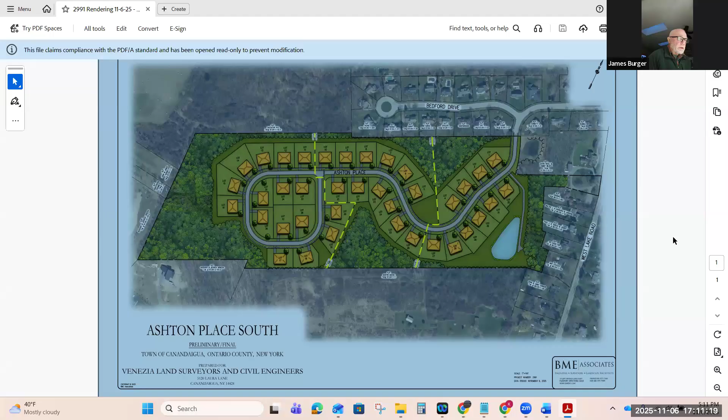We can, if you want to talk about them together - a lot of times when we have these things that kind of overlap, we just talk about them together, we don't cover them separately, so it makes it a little easier. Yeah, that's the one - oh, that's a pretty rendering. Thank you, there we go.

Alright, I know this application was in front of you previously - I believe Anthony Venezia introduced it during the sketch plan review process. I'll go through a quick overview for everybody to familiarize yourself with it again. The subject property totals 44.1 acres, located in the town's Southern Corridor Residential SCR1 zoning district, and also the Scenic Viewshed Overlay district per NRI

map 11, which is lands visible from Canandaigua Lake. The subject property is located on the west side of West Lake Road and to the south of Ashton Place and Bedford Drive. This proposal is for a conservation subdivision pursuant to section 278, the cluster subdivisions of the New York Town Law, and also per section 174-16 cluster subdivisions of the Town Code.

The proposal is for the development of 38 single-family home lots with a minimum lot area of 20,000 square feet. If you recall, during the sketch plan application there were 42 single-family lots, so we've removed 4 of them, primarily in the southwestern corner of the parcel where that gap is - that was a wooded area containing steep slopes, so we pulled those lots off of the steep slope areas.

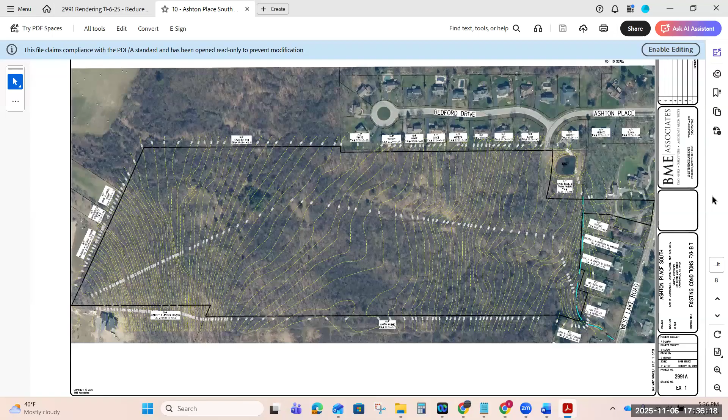All right, so that's the steep slope area on the west in the cyan color. And if you go to the next slide, you can see how we've avoided the majority of that. We had a couple more lots to the south of that, on the southwestern corner, so we pulled the lots away from the steep slope area. As I mentioned previously, the existing steep slope area is approximately 3.0 acres, that's the full limits of the cyan area. The proposed development preserves approximately 2.6 acres of the existing steep slope area within the permanent conservation easement area shown in the blue lines.

So I guess my question would be, why put the additional lots there that are in the steep slope, when they could just be lopped off to have more contiguous preserved land instead of cutting into the steep slopes? It's really just a narrow finger of the steep slope. The primary areas of steep slopes are really along the southern property line - that's where the majority of the large, vast, contiguous area is. This is just a thin finger, we're talking about a 10-foot wide strip.

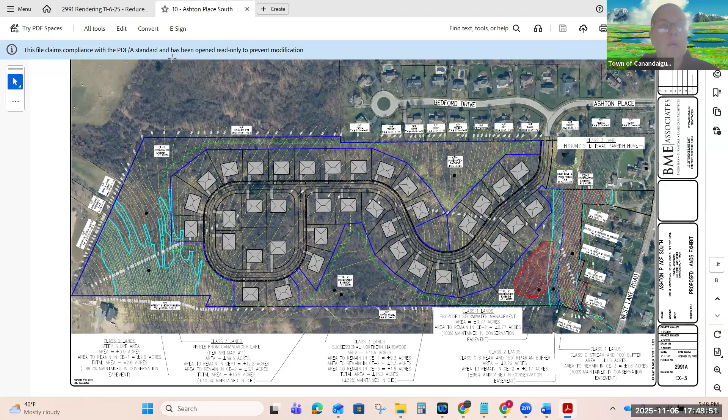And it's only going to be cleared a phase at a time? Yes, and if you can go back to the original rendering we were looking at, that's one thing I can point out too. The project is intended to be completed in 3 phases. The first phase, the phase lines are those dashed yellow lines. The first phase will have 10 lots, developed from east to west, from where it meets the existing Ashton Place, the first 10 lots, then the next 11 or 12, and then the remainder of the loop would be the third phase.

And the road would kind of be extended with each phase? Yes, so the road would terminate in a temporary turnaround for emergency vehicles, plows, stuff like that. Then with each new section, the clearing would happen for that phase, the earthwork operations, and then the road network as well. I think that's really important, that we just don't have a massive clearing, because some of these other phases may be further off.

From the developer's perspective, they wouldn't want to pay for any more than they have to without building lots at that point for a return. So it may extend slightly beyond the phase limits just to get the earthwork balance as necessary, but the general approach would be to clear for each phase, do the earthwork for each phase individually, and then move on to the next phase once that phase is complete, or they choose to move on to the next phase.

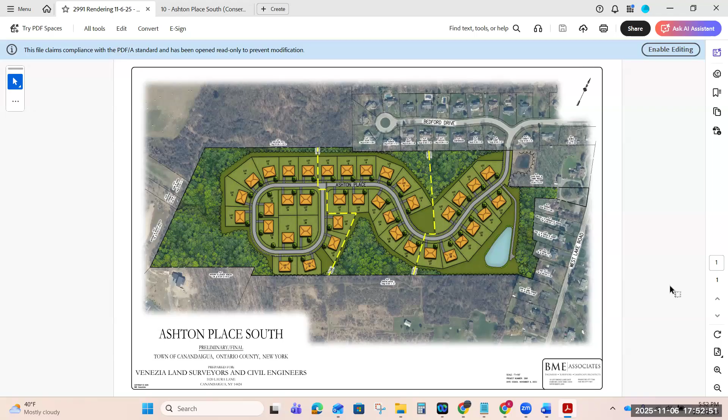So is this new for Venezia to do projects like this? I believe they've done some other smaller subdivisions. Yeah, but nothing this large in size. Okay, yeah, interesting.

I apologize, Edith. I tried to email but I didn't have your phone number, so I couldn't get a hold of you. That's okay, I wish that was just the worst thing that happened today, but it's not even in the running. It would be helpful maybe to have a list of everybody's name and cell numbers just in the event.

Yeah, I'll email that out, I'll do that request. I won't do anything online here because we don't want to share any of that.

Right, good. So I felt bad - Mike said that you had showed up at the town. Not a big deal, no, it's fine, not to worry.

We can move along. Jared had a conflict, so he didn't join us. So I thought maybe it might be easiest for everyone if we just Zoom again tonight.

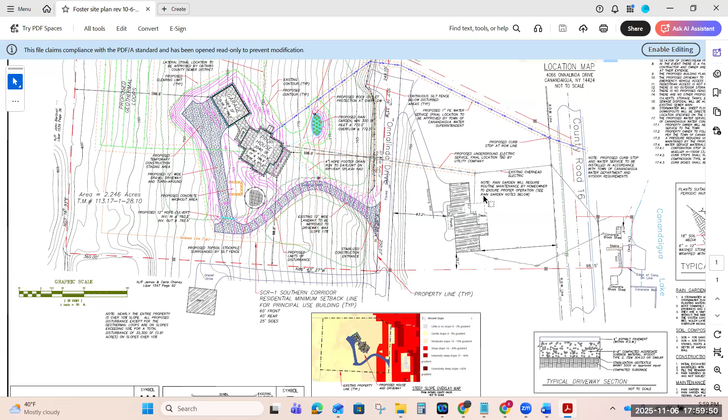I did see they had geothermal marked on here, Gary. Yeah, and actually the owner is a friend of mine, and I talked up my geothermal system, so he went that route. Well, thumbs up for him. So, alright, we will move along then if that's it.

Knapp Road had a site plan and a variance. I think so, let me see - it was something about the driveway being too close to a lot line. That's you're exactly right. Other than that, looked pretty straightforward. I don't see any trees of any consequence.

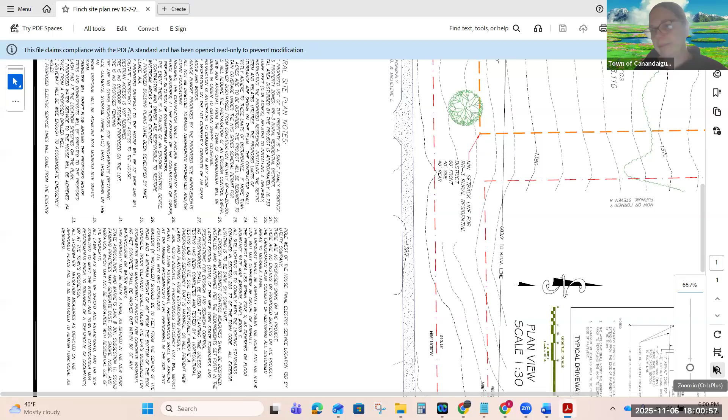I don't care if their driveway's next to the property line. There's some steep slopes, but removed from where they'll be building. When that happens, where it's too close to another property line, does that require the other owner to sign off on it? I know it's definitely a variance - that's what their variance is for, their driveway. I think it goes to a shared driveway, so they would definitely need to have that shared access easement done, and all the property owners agree to what's going on. Since that is a zero setback the way it is, that's why they needed the variance.

This is in the strategic forest protection area, so I would suggest they plant some native canopy trees. I'm surprised that's in the town of Canandaigua - that almost seems like it's in Bristol. Pretty close - the strategic forest protection area is all in the south of the town. Up in the north we have the ag protection areas, and down in the south there's the forest ones. So just as a nod to that, if they can plant some canopy trees - oaks, maples, whatever they have a preference for - it would be nice. That was it, other than don't remove any more trees than they have to.

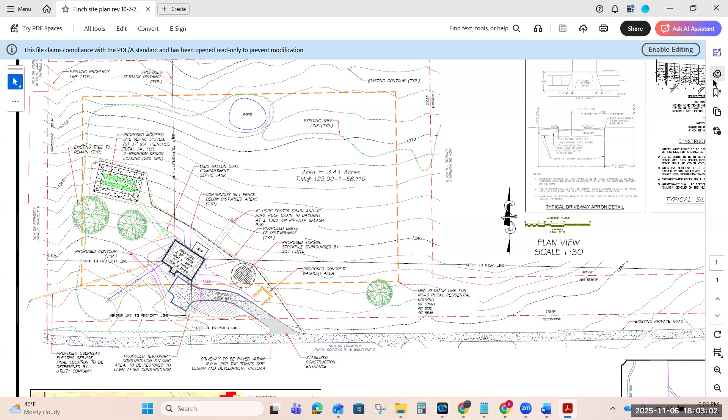Let's see, so that's the two of them. Nobody had any problems with the variance, right? No, no.

Alright, we are getting this reviewed back to us - it got reviewed back to all the referrals. It's the cell tower that we looked at last year on County Road 8, the recurring cell tower.

It's been quite a thing - they were on the third location. And now the new property owner, because it got sold, is considering a fourth location, which we don't have. Oh wait, is there something new? Is today the 6th? Oh, I guess the letter came in today.

Mike, do you know if this one is going to be location 4? Oh, that's what it says here.

Okay, so location 4 is a treed area next to the agricultural parcel that this was supposed to go on. They'll do up a whole new application because it's actually on a different parcel, and it looks like they're planning on a January time frame. So I'd say we could just move this along and not even talk about it, because we'll see different plans come later with the new location.

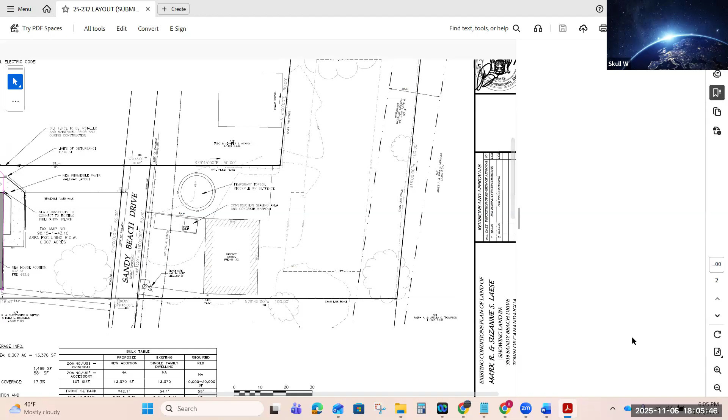They already have so little green space on that property as it is. But it is separated — Kim brought this up this morning — by a private road, so the front part near the lake is required to have 50% maximum, and with the addition they are exactly at 50%. But overall they're only supposed to have 30%, so they're going to be 41.1% over on lot coverage, and the front setback is going to be way too close. I don't know what you can do over on Sandy Beach. It's always going to end up with variances if anybody does improvements. It's just overcrowded over there.

I think as the ECB, we can't support people asking for more lot coverage than what's allowed. So we would have to suggest denial, unless anybody feels differently. No, they know the rules. These places are small, and I'm kind of the opinion there are other places to have big houses and big patios and garages. This just isn't the place for it.

I would say if they're keeping some retained trees, they would have to mark out a root zone for whatever construction they do, so they don't have construction vehicles on it. They're adding no new vegetation in their plans, but they could definitely add something on the other side of the road.

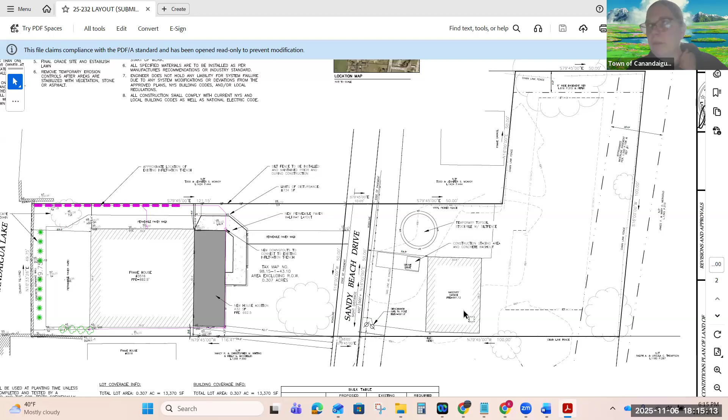Okay. I think I'll put in the comments that we suggest if they're going to build something, to add maybe some more trees or something on the other side of their property here. Yes, and reduce the imperviousness on the house side. Ooh, yep, definitely. Alrighty, keep flying.

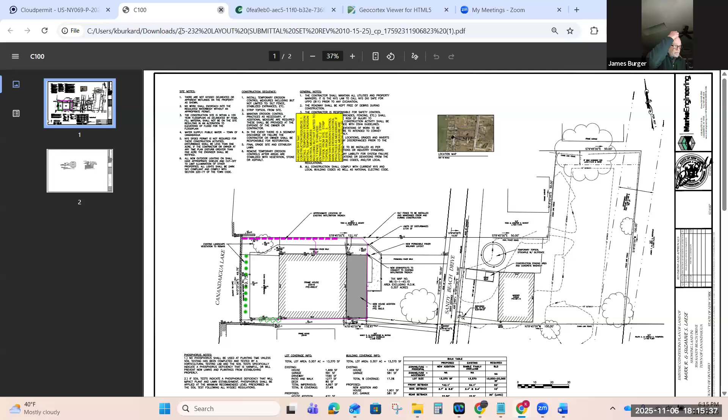Sandy Beach, Brickyard. Jim, you said that you and Gary had gone out for this one? Yep, it seems pretty straightforward. The only thing was the water, the wetland areas there, but it doesn't seem like where they're gonna build the house is in any way affected by that. It's just when you come up their driveway, they might have some water issues with that.

Mike, did you have anything on this one? No, it is pretty straightforward. It's in a lot of different floodplains and steep slopes and agricultural districts, but not where the house is going to be. So the house is flat, they avoided all that. Yeah, so they're good there.

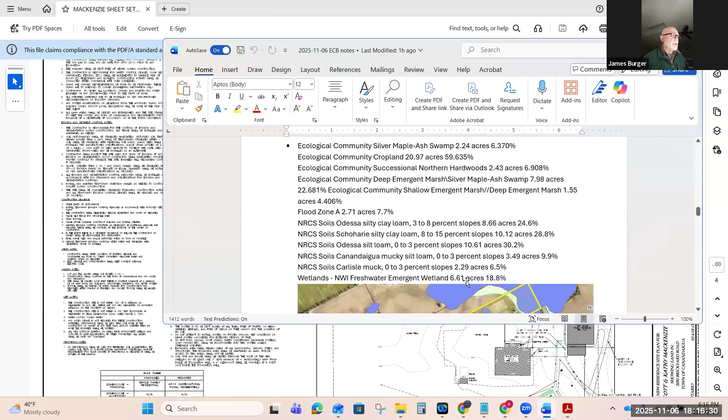I know he's talking about putting geothermal in, yeah, he did. We talked to the guy, he seemed like he was pretty sharp. They're definitely gonna need their environmental jurisdictional thing before they move forward.

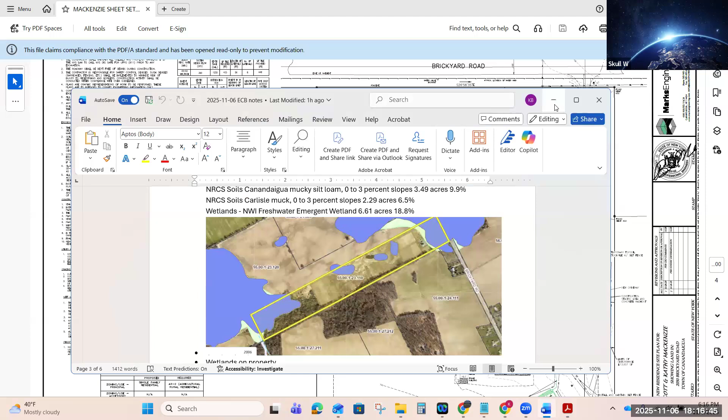Oh, they're putting in geothermal, you said? Well, he's talking about it. Yeah, okay.

I'm looking at the next one here. So in the back of the property, they had silver maple ash swamp. I know the ash are all dead, but it's still one of those rare habitat types. So they'll definitely not want to do any clearing or draining of their wet areas. He's a hunter and was very adamant about keeping everything as natural as possible for the wildlife, very environmentally conscious. We love to hear that.

Excellent. And you said the driveway might be a problem with water, but it's a stone driveway, so that'll be helpful. I think it almost looked like there was no culvert pipe and the water was running over the top of it. So it looked like you could put a culvert pipe in there, raise the driveway up and take care of that if it was an issue.

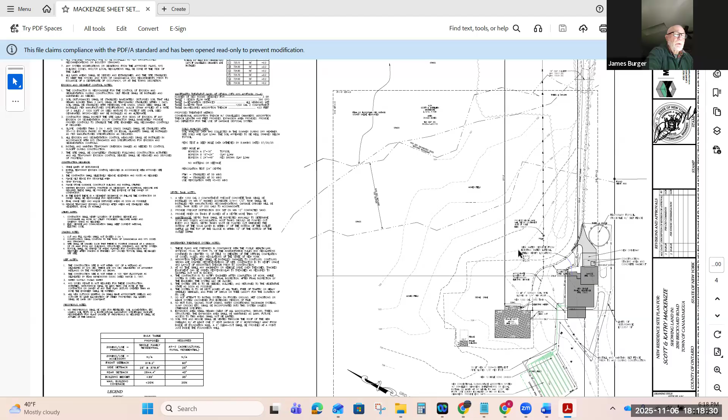I would also suggest he retains his hedgerow there, because I think that was the hardwoods, running right along the edge of the property. I asked him about that and he said that was important. I asked if there was a stream or anything running through there, because it almost looked like there might be sometimes, but there was not. Well, I'm glad to hear.

It's nice to hear when people enjoy the natural resources on their property. So yeah, that was it.

Definitely they should not use a lot of lawn care products, given that they've got shallow emergent marsh and the swamp in back, so definitely go for that Lake Smart lawn care because it would work here too. I would guess they'll probably minimize the lawn anyway, which would be a nice thing. It's not a big, huge area.

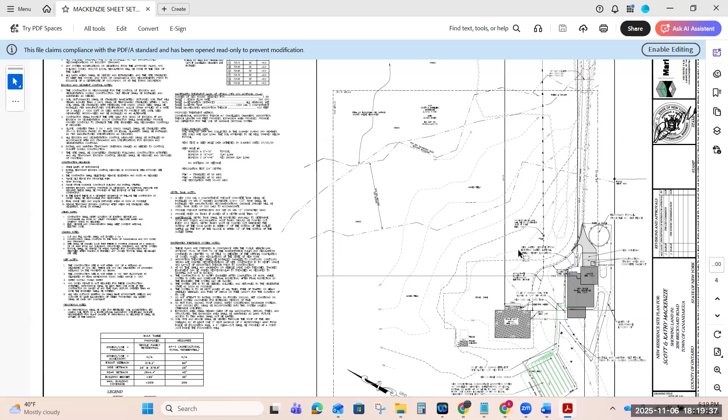It's a small house. Very nice. And he was doing a compliant septic. It's gonna be raised because the percolation wasn't quite up to it, so a raised bed. Very nice.

Was there any other comments or questions? Nope, nope. Going, gone.

And we did those ones, but we have another one on County Road 16. Did you visit this one? Yes, yeah, this is pretty straightforward too. It looks like, on the paperwork I looked at, they called it a barndominium, which is the new thing. So it looks like it's gonna be a large garage with a small living area.

And I think the variance was because it was too close to the property line possibly, but what I read was that they were trying to hide it, so that from the road it's a nice open view. But there was the stream setback, right?

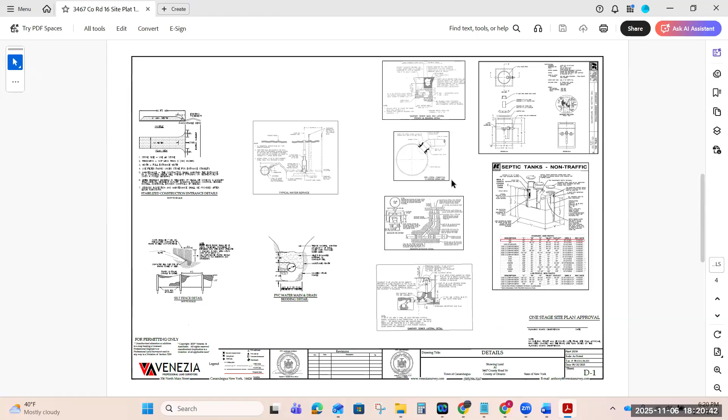This one, Mike, did you- yeah, that's right, there was a stream setback. Where is the stream on this? I was having a hard time. It's at the north of the property, I believe. I can go to OnCOR.

I think I skipped this one inadvertently. Yeah, it's not in your notes, I noticed. I guess I just missed it. Yeah, it was on the north lot, there was a lot of stuff.

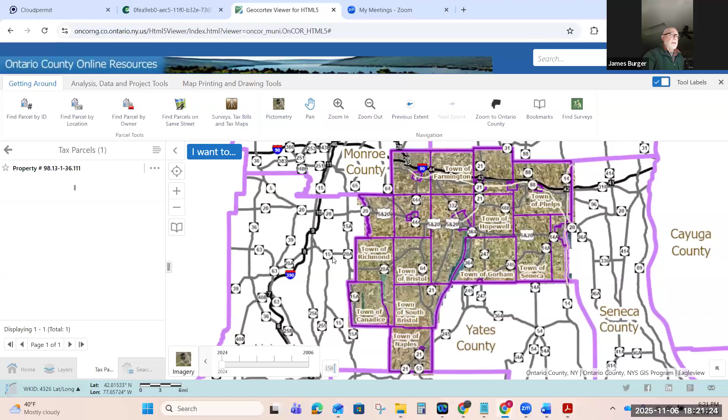I'm sorry, Mike, what were you saying? Oh, that's okay. Yeah, that stream's on the north side of the property, right along the property line. It's a functioning stream, if I'm not mistaken, because I used to take care of the property on the other side of West Lake Road, and I can remember water coming down on that property through the stream.

Oh yep, the stream is right there. I always love it when it looks like it's going through the house. When it looks like it more goes right along here.

Wasn't there a property there in the past that was demoed? It could be, I think that creek is reinforced there. Could be, I think that was the Cook's property, I think. Yeah, they used to have a property on the other side, or it was actually the property to the east of that. There's a lot of pictures and stuff I remember from that showing that area.

On Apple Maps, it looks like there's a big rock swale in between those two large houses. Is this property related to that other humongous castle house?

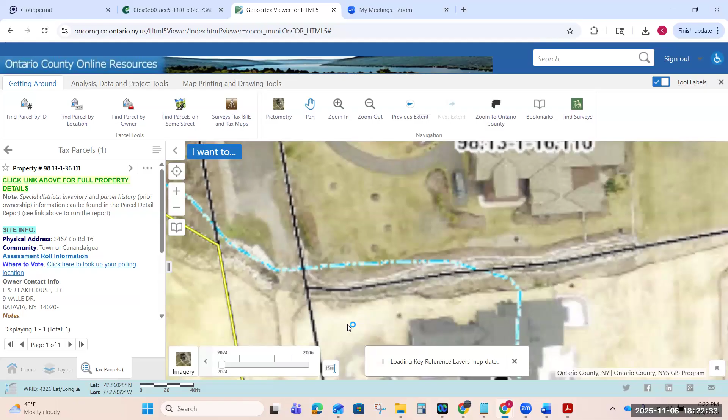You can see it's the same owner, I think. Yeah, it all came together at the same time. It's so close, looks like they're trying to make it work. I think it's probably a place where they can put all their toys and maybe have a little guest house.

Looks like they're wrapping it with tile and probably tying in their gutters, and then they have a little drainage area there off by the driveway, a stormwater infiltration area.

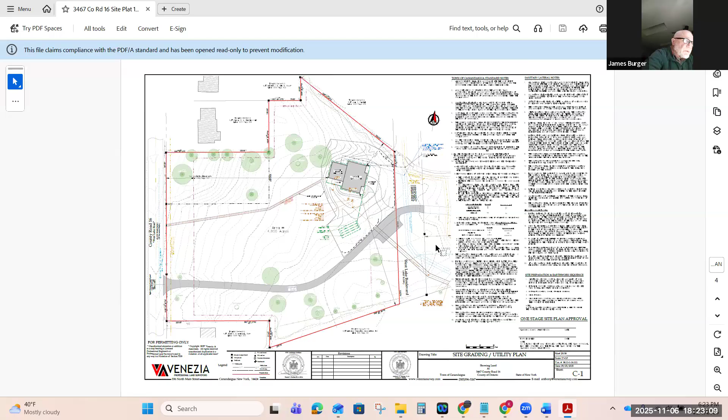Yeah, it was pretty substantial, their vegetation plan. I think there was a plan too for that rip-rapped area with different plantings to slow everything down, for the house lot.

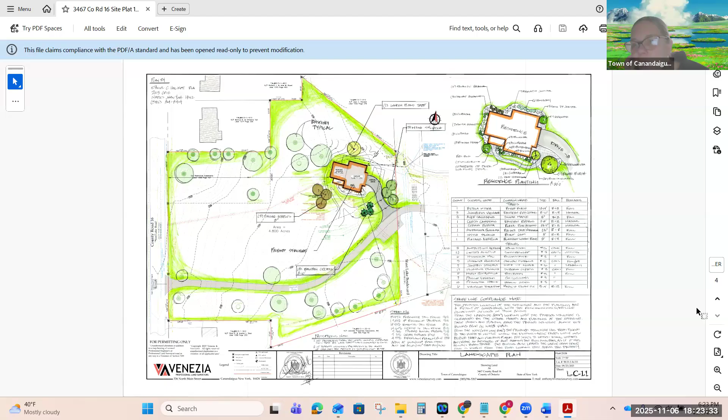'Cause those are all added trees, right, that they're showing on that plan? Yeah, nothing there now, 'cause it's just a big field right now.

Yeah, there's some trees over on the property line. River birch, red cedar, sugar maple, redbud, pink dogwood, PeeGee tree, hydrangea, black gum, London plane, little bluestem, summersweet, or hydrangeas, juniper, some sort of cypress, bayberry, switchgrass, Hameln grass, and viburnums.

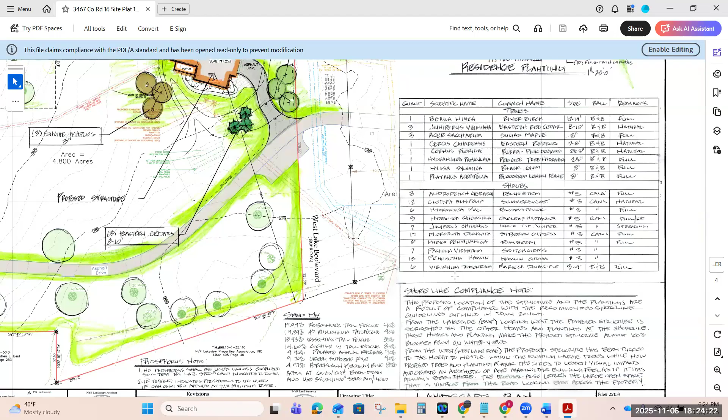Are they gonna mow all that grass, or are they doing like a wildflower area? Hard to say, I'd guess if they're doing bluestem they're probably gonna let some of it grow out. I would promote native wildflower, not mowing would be great. Not mowing 4 acres though... I doubt they'll do that.

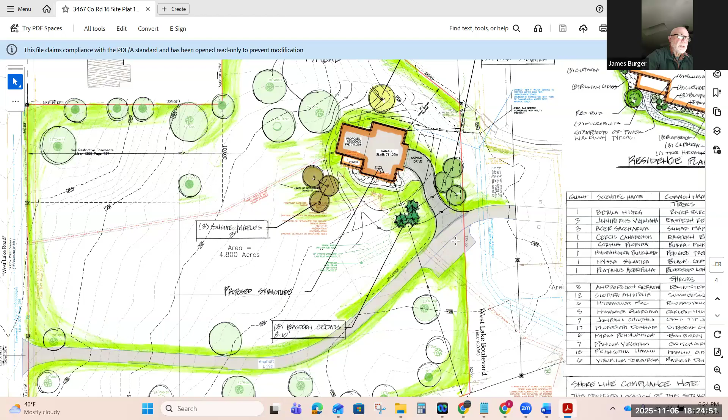It's already been all excavated and reseeded nicely, so that's probably permanent, which is good to go.

If they could make some pollinator areas or plant meadowy type things with grass, that'd be nice. It's quite a process to do all that, but it looks like the grass is mostly around the house. He's got fountain grass marked on there, but it's not on here.

If I remember, fountain grass is not a recommended one. Correct, it is not recommended. I'll have to put that in the notes.

I would suggest some plantings. Or are they leaving stuff already there? I can't see, I'm sorry. Was there shrubbery on this side? I guess there is some.

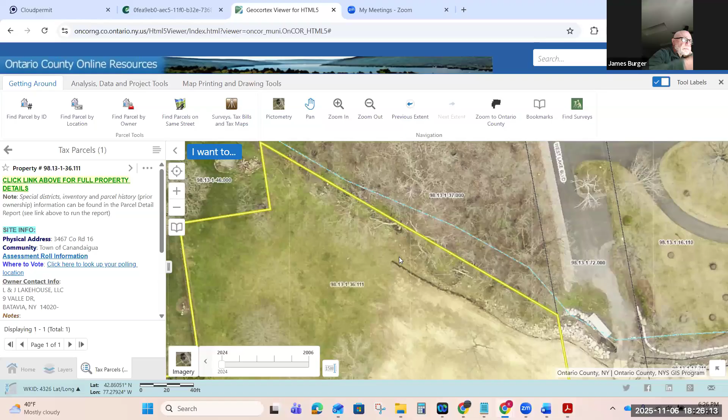Looks like it's on the south side. It would be the north side, along the stream sort of. Yeah, maybe because there's trees over there, it might be shadier.

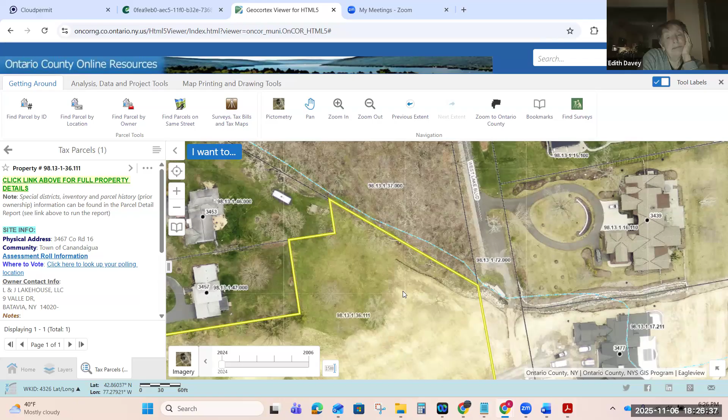Mike, what variances were they looking for here? Just to the stream. Is there a reason why they can't move it back away from the stream? Yeah, that's what we wondered too, we asked them, but they did not give a clear reason.

I think I read somewhere that they wanted to kind of hide it up in there to keep that open lot open so you can look at their house, I guess. You can't really see the lake. But given that this lot is almost 5 acres, they can move it elsewhere on the property, it doesn't have to be next to the stream.

I don't know what everybody else thinks, but I would say denial on that one. It does look close, like they're trying, but they've got plenty of room. I could look to see how flat it is, but yeah, it's pretty flat.

Might save their basement from flooding, moving it away from the stream. Yeah. Wonder if it's on a slab.

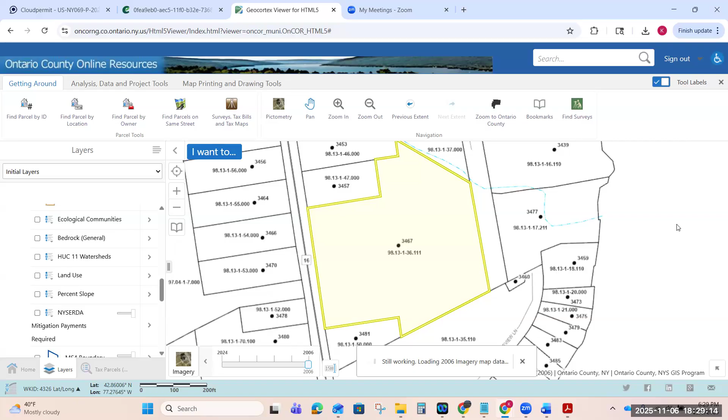So there was a pipe, must have been a pipe. Yeah, I think it was the early 2000s. Sorry, it's not what we're here for, but just for the background of the site. So I would definitely... oh yeah, there's places here.

Wow, it looks a lot different. Yeah.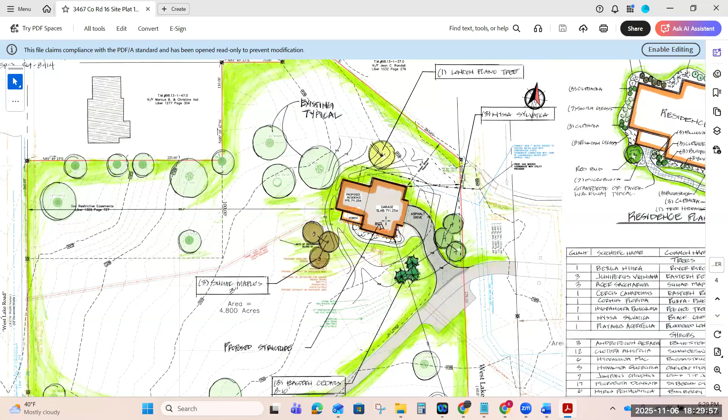Just looking at the plan, it's clearly one corner of the house that's encroaching on the stream, and the garage. I wonder why they can't just swing it around a little further. I think that would be our suggestion. I think so too.

Yeah, that's what I thought. But that's not an appropriate response. Not a great idea. I know, I'm just, yeah, this is a self-created hardship. Very much so. Exactly. First world problem.

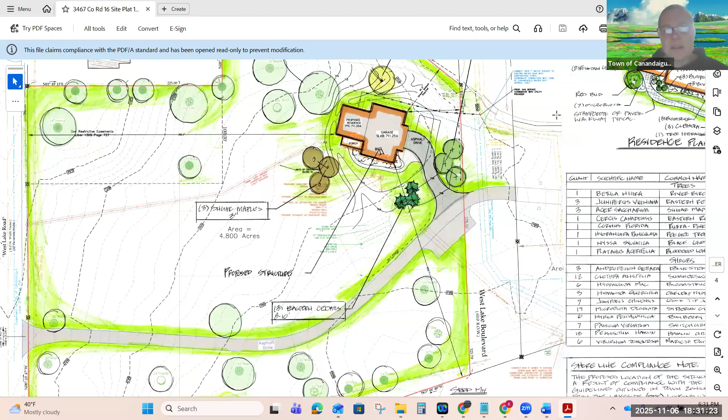That's actually one of the variance questions. Alrighty. Any other comments on this? Nope, nothing here. So denial, but also recommendation that they plant around to add riparian habitat.

Because it would help that stream. It would be a buffer for flooding events sort of thing, if they could put shrubs and things along there. And if the zoning board lets them have the variance, that would be even more important. Yeah, I would agree.

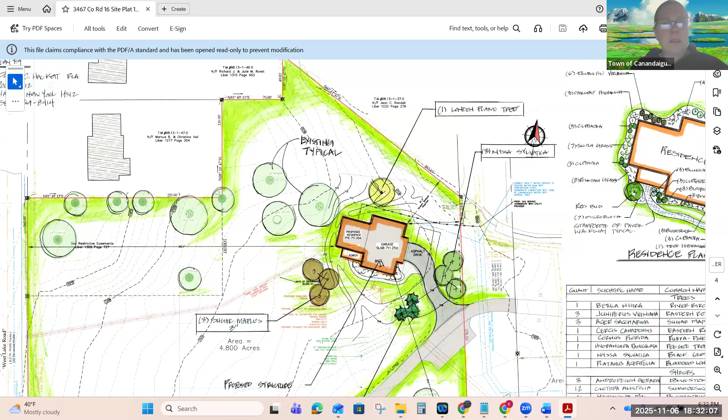So, all right. And we did the Ashton Place one. I don't know how I missed that one, but I did. I was doing some of these very late last night, so.

So form-based code, they are doing a major update. The document that's in here is just a list of the changes and stuff that they want to make. I wouldn't suggest just going through it, but if you have any comments whatsoever on form-based code, because we have looked at a few applications there, I can put it in our comments and send that along.

Did anyone have any comments, or I can tell you about some of the things that they're working on that they've suggested? Basically, a lot of what they've suggested is watering down the original intent of form-based code, because form-based code was based upon what it looks like, not so much how it's used. It was trying to change the 332 corridor area into being a prettier entry into Canandaigua.